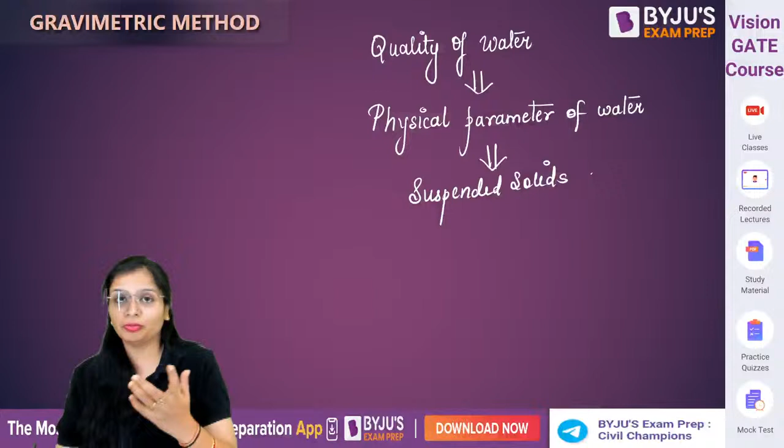But before talking about suspended solids, we have to discuss a few related things: from where do suspended solids come in water, what is the impact of it, how can you measure it, and if there is any limit, what is that limit? We will be discussing all these things about suspended solids.

Now, if you talk about the source of suspended solids, first of all the sources can be either organic in nature. As you can see, suspended solids basically means water with some sort of solids floating in it. Now, where do you get these suspended solids from?

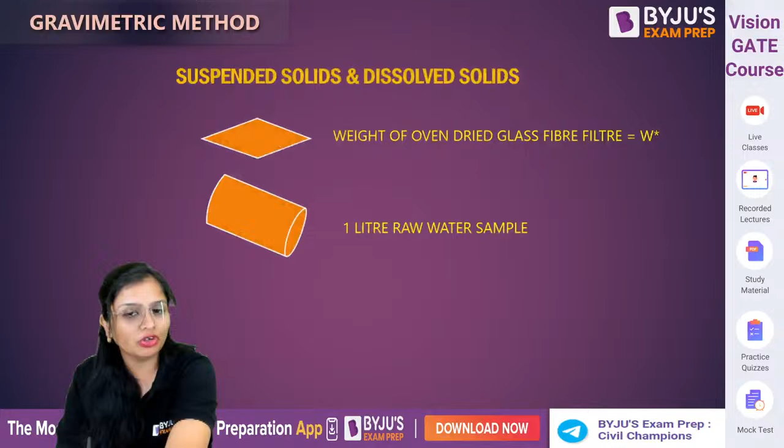If I talk about suspended solids, let me first show you the type of solids. So the suspended solids can be organic or inorganic. The sources can be organic as well as inorganic.

Now you will ask, how can we distinguish between organic and inorganic compounds? Let me tell you: organic compounds are generally those which predominantly have carbon in them. I'm not taking exceptions into account, since you might say 'this is organic but it doesn't have carbon.' So generally speaking, to distinguish organic or inorganic compounds: organic compounds are those with predominantly carbon, while inorganic compounds are those which basically don't consist of carbon.

Now comes the question of whether it be clay or silt particles, which are inorganic compounds, or whether it be organic compounds which have carbon—if either is present in water, its presence will impart solids.

Now if solids are present, what is the issue? Is it not good for us? Let me tell you. Suppose you come to my home and I give you water in which some sort of solids are floating. Will you drink that water? Of course not. Why? Because you have a psychological impact in your mind.

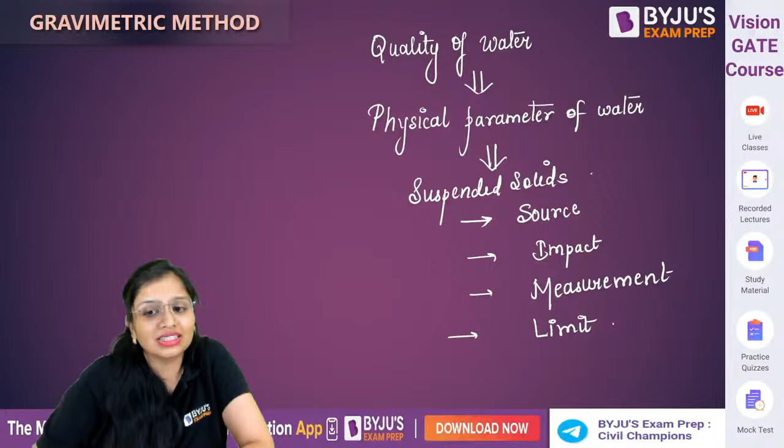If I'm giving you a glass of water which consists of suspended solids, you have it in your mind that it's not looking good, we won't drink that water. So because it is a psychological impact, this is the first impact: it is aesthetically displeasing.

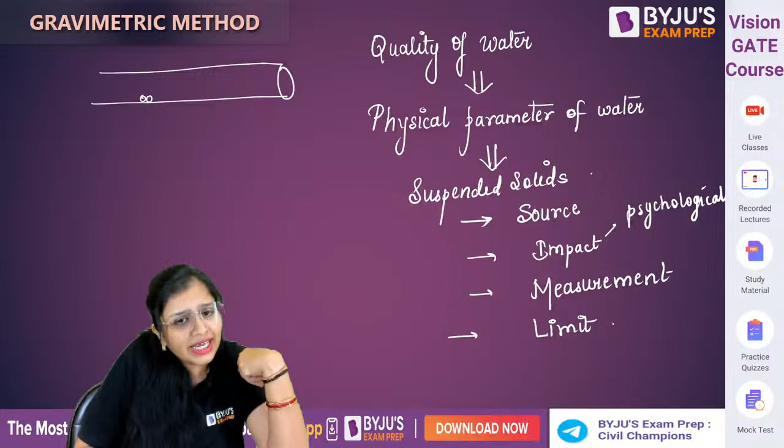Now talking about the next impact. Suspended solids are there. Water, how do you carry it? With the help of pipes. If in these pipes the suspended solids get deposited, initially this much area was available for water to flow. Now since suspended solids are getting deposited in the pipeline, you have less area to flow. You never say that discharge in the pipeline is reduced—this is also an interview question, so remember that.

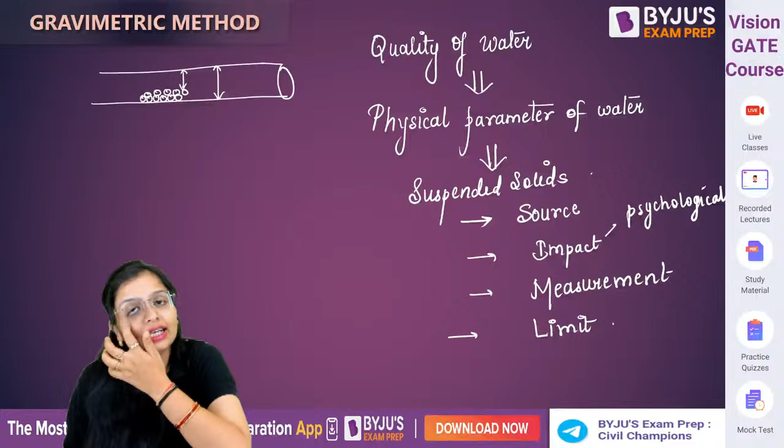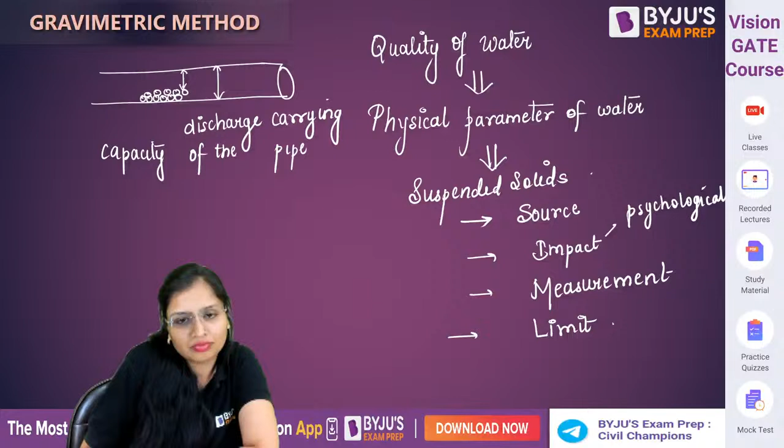You say that if deposition of solids takes place, the discharge carrying capacity of the pipeline will reduce. So it's the discharge carrying capacity of the pipe that will reduce. Why? Because eventually over time the suspended solids get deposited, and that is the reason the discharge carrying capacity of the pipe will reduce.

Now the next impact: generally in the Indian subcontinent we use chlorine for disinfection. You may ask, ma'am, why don't we use ozone and such? We'll deal with that when I teach you disinfection—it's costly, and there are more factors to consider while choosing a disinfectant. So when you add chlorine for disinfection, what happens if you haven't treated the suspended solids and they're present in water?

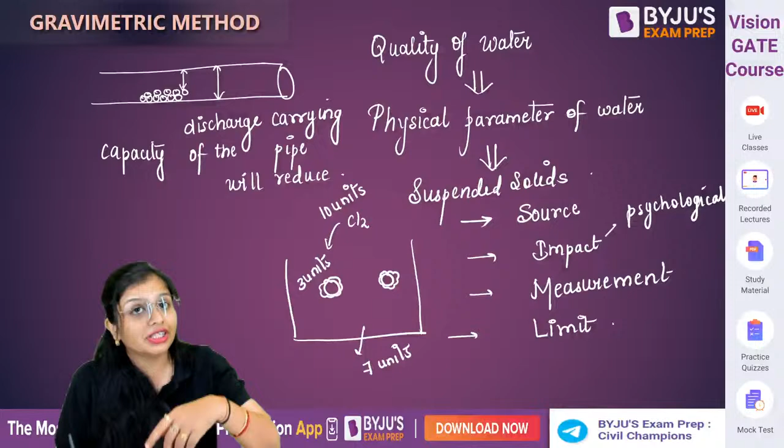See, these suspended solids are present, so what happens? The chlorine will be absorbed. Suppose you added 10 units of chlorine for disinfection, and 3 units got absorbed. So how much is available for disinfection? 7 units. That means your disinfection will not be completed, because you require 10 units of chlorine dosage, but 3 units got stuck with the suspended solids. So the available chlorine for disinfection is only 7 units.

That means disinfection is not completed, so you need to add more amount of chlorine. That is also one of the impacts you get if suspended solids are present in water.

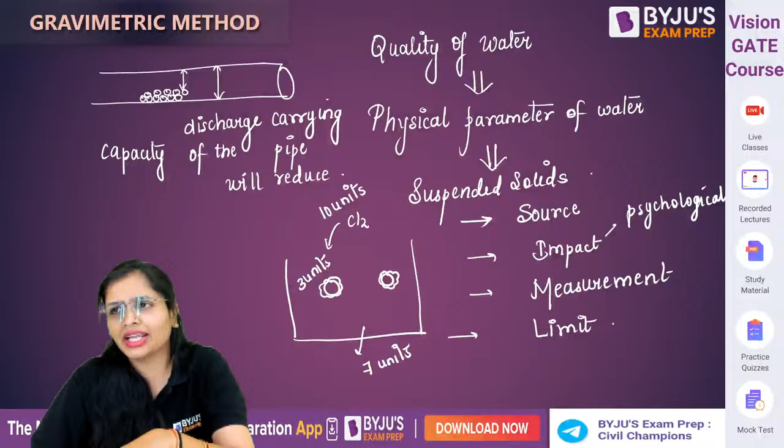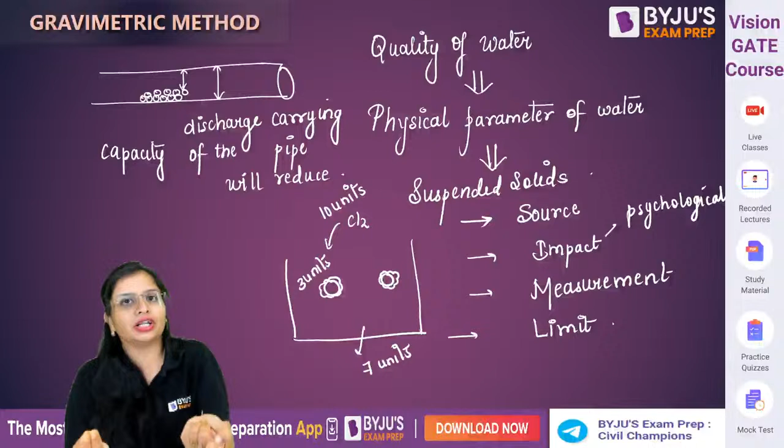So now you know the source can come from sand, silt, organic solids—it can come from anywhere. The impact we also know. But how do we know how much suspended solids are present in water? Can you say it in terms of teaspoon or tablespoon? No, you have to express it in terms of a particular unit and value. That's why we go for the measurement of suspended solids, and this is very important because questions from this topic have been asked.

For doing everything there is a technique. So measurement of suspended solids is done with the gravimetric technique. Gravimetric technique means we will measure its weight—we will report in terms of weight. That's why it is called the gravimetric method.

Now let's check what happens here. Technically, if you talk in a wider range, there are total solids. Let me tell you first in a wider range: you have total solids. Let me add a slide and I'll explain that.

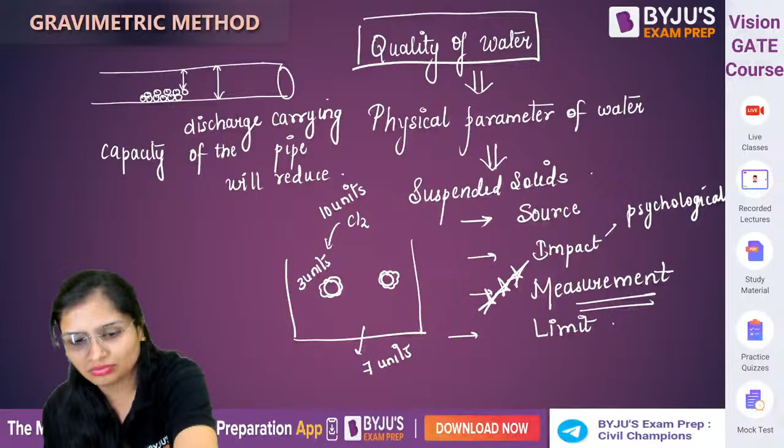Okay, now let me tell you. First we have total solids. This total solids consists of both suspended solids and dissolved solids. Suspended solids are those in suspension in water, while dissolved solids are soluble and have been dissolved in water. These are those solids, correct?

Now technically we have to talk about the measurement of total solids and suspended solids, but I'll also tell you about measurement of dissolved solids. Remember guys, the procedure I'm going to tell you, they will not tell you in the question that doing this procedure you will get suspended solids, or dissolved solids, or total solids. You will check out the procedure and you have to rectify and know whether it is total solids or suspended solids. They will write the procedure and whatever value you get, they'll tell you, but they will not tell you which type of solid it is.

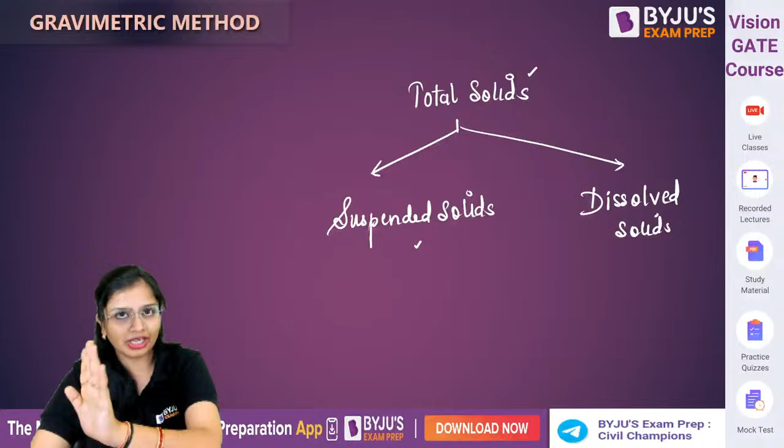So that is the reason the procedure to calculate the weight, to know the weight, is important. Otherwise you won't be able to solve it. That's why the whole method of gravimetric analysis is important, and only then will you understand when you are getting suspended solids, dissolved solids, or total solids. We will even go into a more detailed version, organic, inorganic. Just wait in this session, we'll solve questions also. It's not that I'll just teach you the theory and leave.

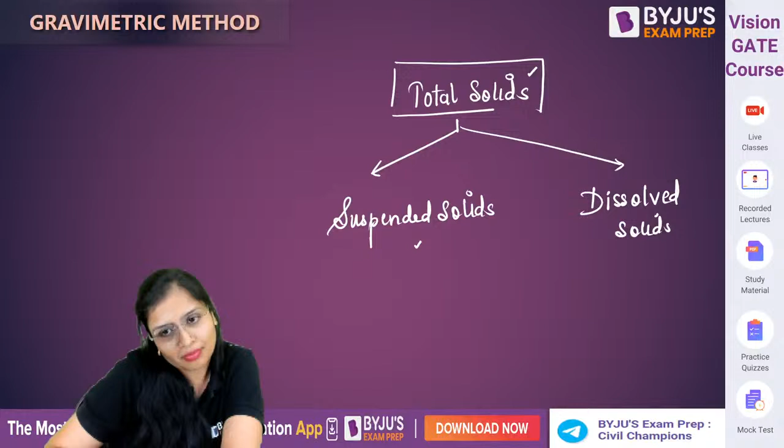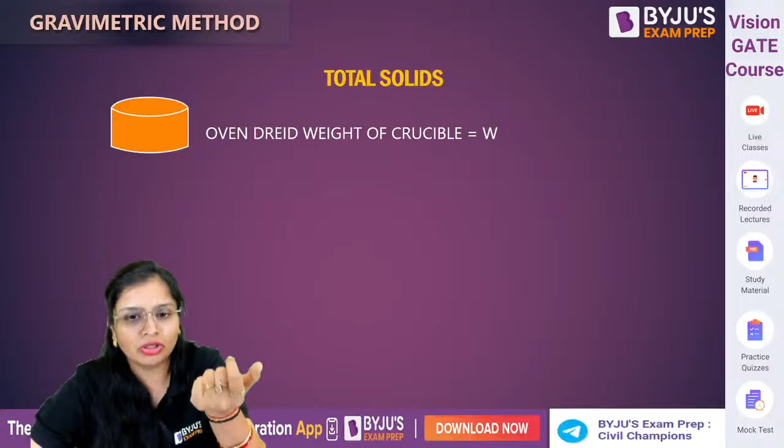Now first of all, let us target total solids. You have a beaker, you have a crucible also, you can say that is like a China dish. So generally sometimes moisture is there in it. So sometimes they'll give you, just to confuse you, the weight of the crucible with moisture and then the weight of the crucible separately. So you need to subtract the moisture content, because we don't want any water present inside that crucible. So we want it oven dried.

So we want the weight oven dried, let us suppose its weight is W. I am just telling you first the denotions which are there in the book, but practically I'll advise you, and I'll teach you in that manner too, that don't go through the denotions only. It is very confusing, you will just hate it if you go through the denotions. So it's better to go through the logic rather than the denotions. But some people are more fond of denotions also, so I'll tell you both ways. Whichever way you are comfortable, you can go through it.

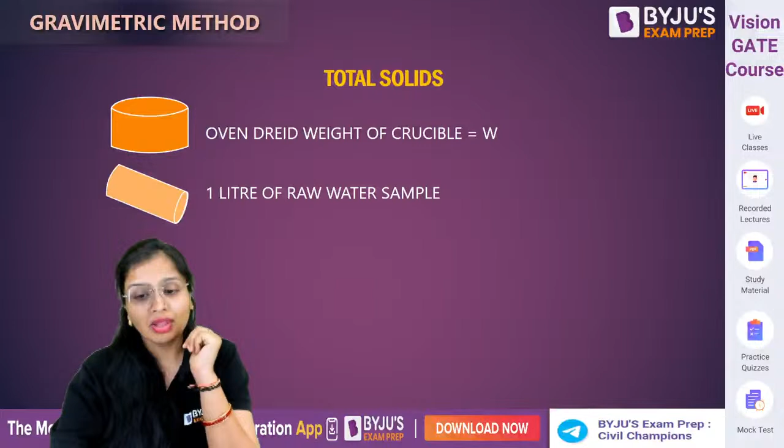Now let us suppose we have taken 1 liter of raw water sample. Raw water is that sample which is to be treated further, and right now we are going to measure how much suspended solids is there, how much dissolved solids is there. But before measuring individually, we will measure the total solids. So now in this crucible you will put the 1 liter of water. This raw water will have both suspended solids, in short SS, and dissolved solids. Now we'll put it in an oven at 104 degrees Celsius for approximately 24 hours.

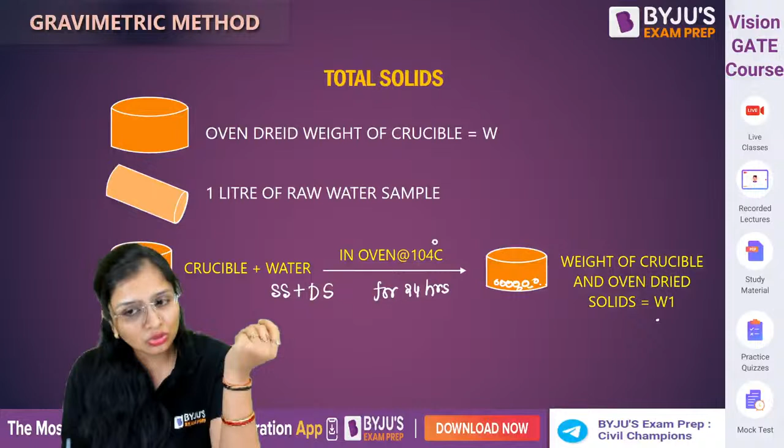Now what will happen? The water at this 104 degrees Celsius temperature will vaporize. The leftover particle will be total solids, and total solids will have both suspended and dissolved solids. So it is the crucible weight plus the solids weight. So from this crucible and dried solids weight, when you subtract the weight of the crucible, you will get the weight of the total solids. And I'm telling you again, total solids will include both suspended solids and dissolved solids.

And if you want the concentration, concentration is weight upon volume. Right now you are taking 1 liter of the sample, so divide by 1 liter. So this is the concentration of total solids. Now, total solids consists of both suspended solids and dissolved solids. Now if I want to measure individually how much suspended solids is there and how much dissolved solids is there, let's check that out too. First, the total solids which is there, you will pass it through a glass fiber filter.

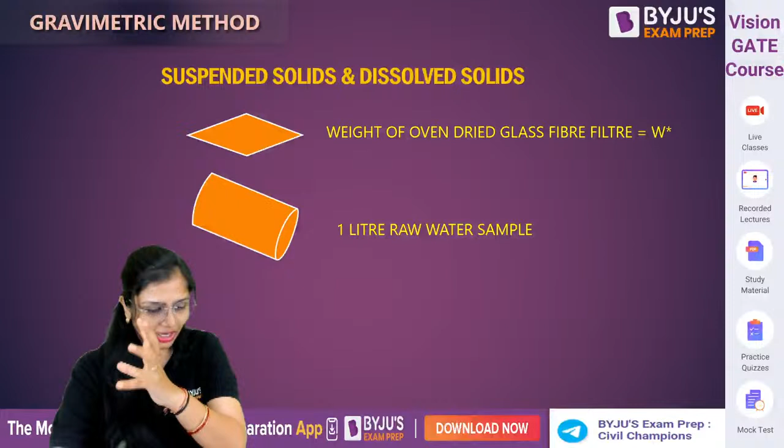Glass fiber filter, basically you call it filter paper, but if you go in detail you will call it glass fiber filter. Now in this filter, first you can take the weight of it. In some questions they will give you the weight of glass fiber filters, in some cases they don't.

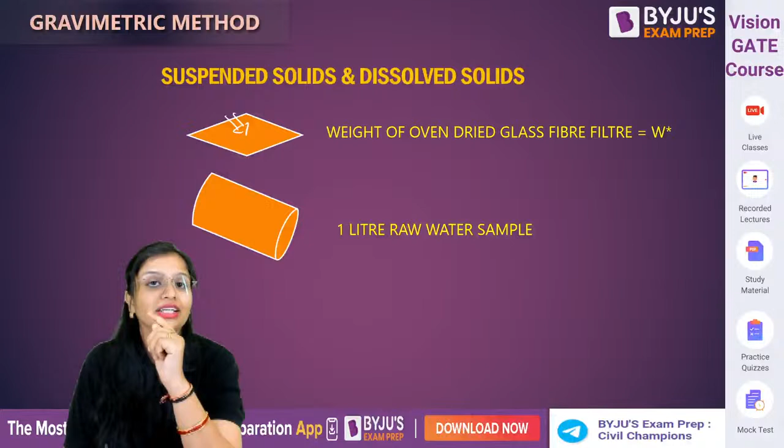Now what you will do is take this oven dried glass fiber filter and add water to it, the water in which you want to find the suspended solids. So when you add the water, what will happen is the suspended solids, however much are there, will be retained.

And the dissolved solids will pass through. So the filter paper along with the solids you will oven dry again at 104 degrees Celsius for 24 hours. So whatever vapor, whatever water was present - now you'll ask why water will be present, because it has passed through the glass fiber filter.

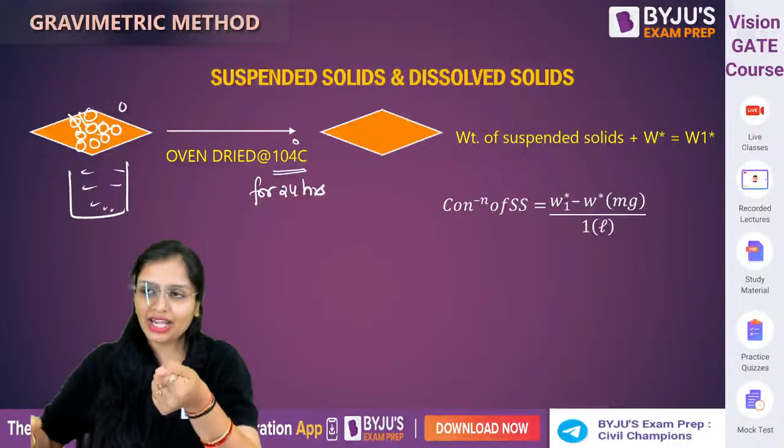Let me tell you one thing, everybody would have made tea, or if you haven't, you might have seen it. When you take the sieve and pour the tea, the leaves get accumulated in that sieve, right? Now that is suspended solids. Now when you press that sieve with the tea leaves using a spoon, you still see tea coming out. Exactly that is happening here with the glass fiber filter.

You have poured 1 liter of the sample, but still in the suspended solids, water is present, and you don't need to calculate the weight of that water. You only need the amount of suspended solids. That is why you oven dry it, so that if any moisture content is present, it vaporizes and you get only the weight of suspended solids.

So when you oven dry it, you will get the suspended solids plus the glass fiber filter weight combined. When you subtract the weight of the glass fiber filter, you will get only the suspended solids. It is not mandatory that in every question they will give you the glass fiber filter weight also.

It is in micrometers, beta. It is in micrometers - glass fiber filter fibers, you know, it is in microns. So here you will get the concentration of suspended solids.

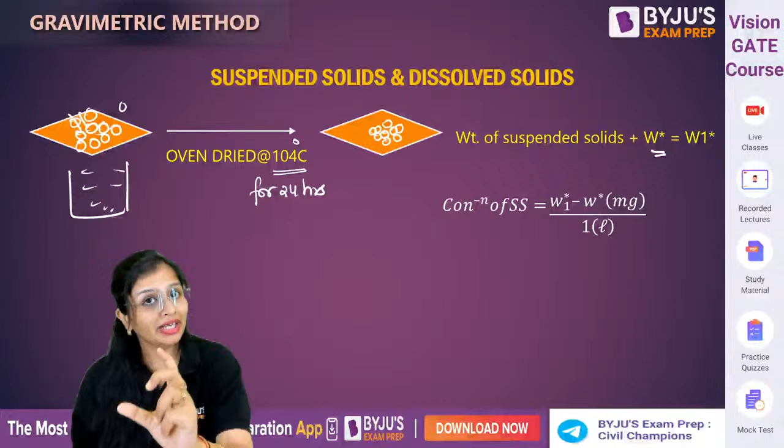And let me tell you, it is not mandatory that in every question they give you the weight of the glass fiber filter. Sometimes they neglect it, thinking it is very negligible. So don't panic that I taught it but it's not mentioned in the question - it may be they are not considering it as an impact.

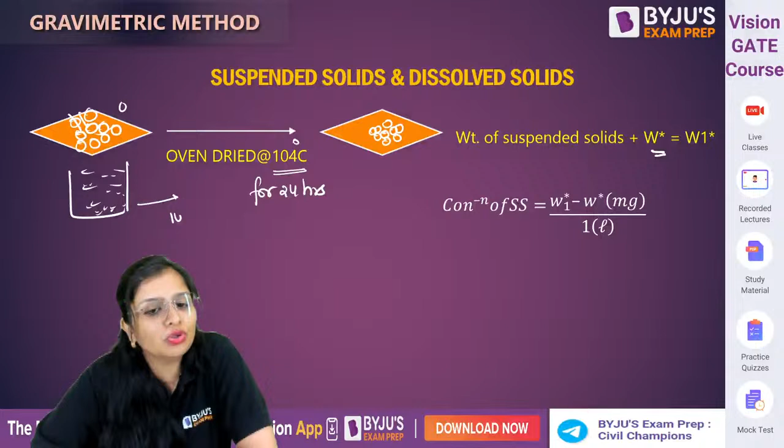Now, the amount of dissolved solids which have passed through the glass fiber filter, because they were dissolved solids, they haven't been retained on the filter paper. This, when you oven dry at 104 degrees Celsius for 24 hours, you will get dissolved solids.

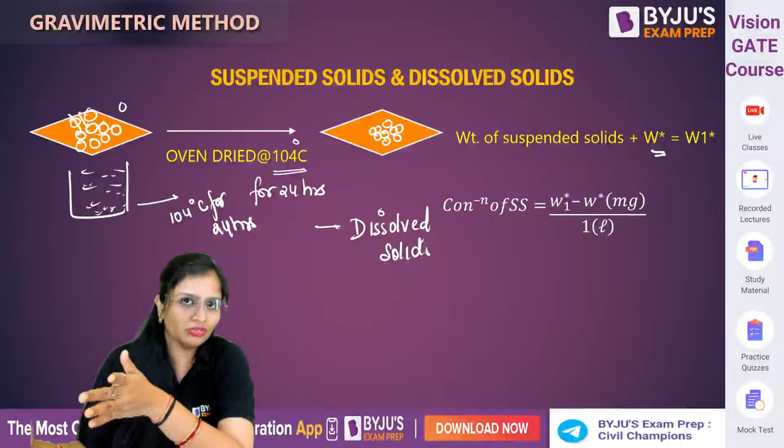So here you can also measure dissolved solids. When passing that 1 liter water sample through the glass fiber filter, you keep a crucible or beaker. Whatever suspended solids are there will retain on the filter, and whatever dissolved solids are there will pass through. The ones that passed along with water into that beaker or crucible, you heat for 104 degrees Celsius for 24 hours, and you get the weight of the dissolved solids.

So in this manner, you can get suspended solids, dissolved solids, and total solids. Now let me make it very clear - this procedure will be told to you, but they will not tell you exactly by doing what step you got suspended solids versus dissolved solids. You have to apply your brain to identify, oh this is suspended solids, oh this is dissolved solids. That is the reason I'm stressing more on the procedure, because you have to identify it.

Now, moving into more detail - basically you can classify them in different ways. Like the people who are in the class, I can classify you based on your gender, based on your age, based on the semester you are studying, based on your 12th percentage, based on your height, based on your weight.

There are so many ways by which I can classify you, but you people will remain the same. Only the means by which I'm classifying will change, but that doesn't mean the number of students in the class will change, correct? Similarly, right now I said total solids will be the summation of suspended solids and dissolved solids.

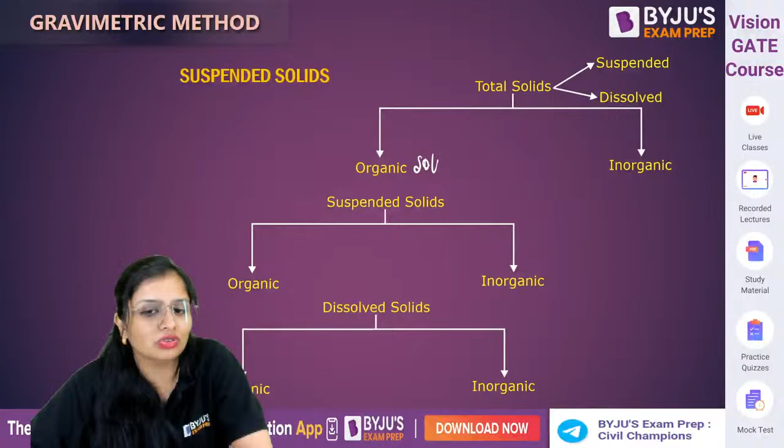Now there is another way of classifying, that is organic solids and inorganic solids. Already I told you organic solids are the one in which predominantly carbon is there. Inorganic solids generally don't have carbon in it. I'm not taking into account the exceptions.

Now you can ask me, ma'am, total solids can be organic solids, correct? True. Total solids can be inorganic solids, correct? Okay, now I want to measure, like I measured in total solids how much is suspended solids and how much is dissolved solids. Similarly, I want to measure in total solids how much is organic solids and how much is inorganic solids.

How can I measure? So let's talk about it. Now, just a minute.

Organic solid has the property that if you heat it at a very high temperature — now you will say, ma'am, high means how much? 600 to 650 degrees Celsius. So if you heat it at a very high temperature, it's like sublimation you might have studied in chemistry class 9, like camphor. It just directly converts from solid to vapor state.

Similarly, organic solids, if you provide a very high temperature, around 600 to 650 degrees Celsius, what will happen is it will vaporize directly without being converted to liquid state. So now what you will do?

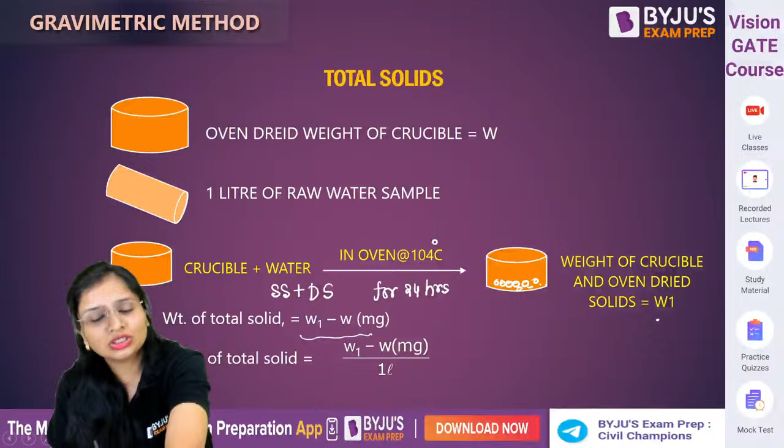Now listen to me. The total solids which you calculated, just check it out. This is the total solids you calculated, right? This total solids you will take it and you will put it in a special type of furnace.

Ma'am, for how many hours? At 600 to 650 degrees Celsius, you will take the total solids and put it in the muffle furnace for 1 to 3 hours. What will happen? Whatsoever organic solids is there, they will vaporize.

So what will be remaining? The inorganic solids. Inorganic solids will remain, so the one which remains, you can calculate the weight of it because it is remaining — you will measure the weight of it. Total solids you already calculated initially. Inorganic solids, you will measure the weight of it.

So organic solids will be how much? Total solids minus inorganic solids.

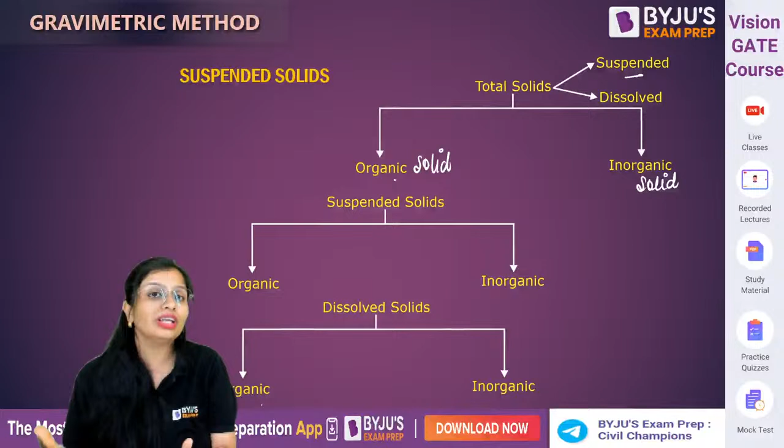Now, you can ask me, ma'am, even suspended solids can be organic and inorganic. Of course, even dissolved solids can also be inorganic and organic. Yes. So if next year GATE asks how much suspended organic is there, how much suspended inorganic is there, and so on, how to calculate that we will also see. But before that, based on what we've studied, let's solve a question related to it.

Okay, so right now generally we take 1 liter, but here they have taken the volume as 50 ml. Empty weight of the crucible is given to you as 54.352 grams. Now see, they are telling you the procedure.

Now you have to identify: the crucible with the sample, meaning water is also there, that crucible is dried in an oven at 104 degrees Celsius till the weight is attained to be 55.129 grams. That means crucible weight plus total solids. Moisture is gone, so crucible plus total solids weight they have given you as 55.129 grams.

Now, going further, thereafter the crucible with the dried sample is put at 600 degrees Celsius for 1 hour in a muffle furnace. You know then when total solids will go, volatile solids will vaporize and the remaining one which you will get will be inorganic solids. So 54.783 grams - this is crucible weight plus inorganic solids.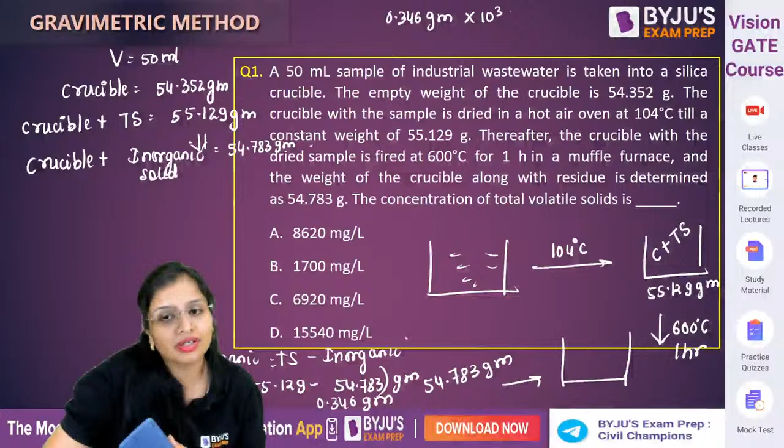But in the question, it is not asking me the weight, it is asking me the concentration. So 0.346 grams converted into milligrams is 10 raised to power 3. And this is present in how much volume? 50 ml, convert ml into liters, divide by 1000, you will get the answer. How much it will come? 6920 mg.

Clear? Now coming up further to the next question. Let's look at this carefully.

A 100 ml water sample was filtered through an oven dry filter paper. Now here weight of the filter paper is also given to you, that is 2.4 grams. Good question. And the filtrate collected in a crucible, the remaining water collected, is 23.50 grams.

Now some things are given for confusing, not every data is to be used. After oven drying at 104 degrees Celsius for 24 hours, resulting weight of the filter paper - initially the filter paper weight was 2.4 grams. Now in that filter paper suspended solids was also there. So after you oven dried it, the weight of the filter paper came out to be 2.465 grams.

In this, filter paper is also there and suspended solids is also there - filter paper plus suspended solids. Now see, this I am telling you based on the procedure. Nowhere in the question has it mentioned that it is suspended solids. Now you're getting what I'm saying? That's why I'm emphasizing on the procedure, because they are not going to tell you.

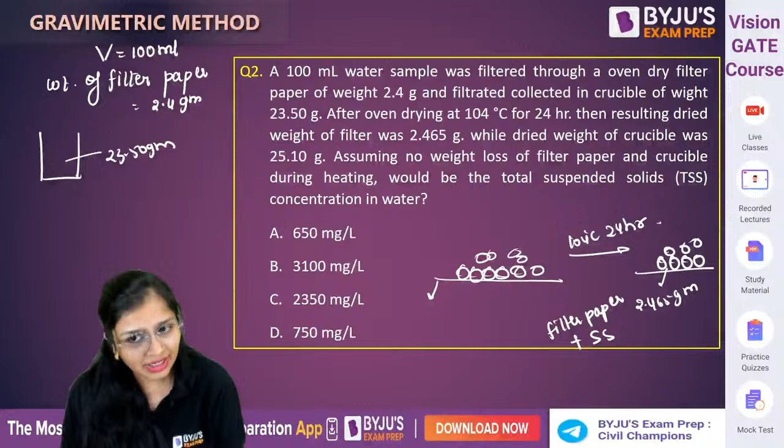So initially only the weight of the filter paper is given, and after that when you oven dry it, the filter paper and suspended solids weight is given to you. Now they're asking, no weight loss is taking place of filter paper, so what will be the total solids? Now see, this data you don't require, this is given to you just for confusing, because we don't need the weight of the crucible in the case of suspended solids. That is given just for confusing you.

You need only total suspended solids. So 2.465 grams was the weight of filter paper plus suspended solids. So you will subtract the weight of filter paper, that is minus 2.4 grams. And when you convert grams into milligrams, 10 raised to power 3. And this is present in how much sample? 100 ml, so convert ml into liters. You'll get the answer - you will get it as 650 mg per liter.

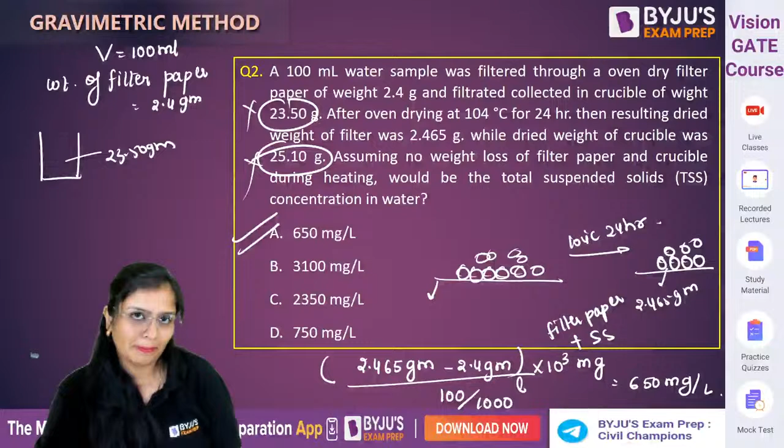So this will be the concentration. So see, they haven't asked related to filter paper, but definitely they can ask you. So some questions this data has no use - no use of crucible, because right now we are measuring suspended solids, and when you're measuring suspended solids, you're only bothered about the filter paper. Clear? Now coming to the next question.

Fine, take it out. A crucible was dried to a constant mass of 65 grams. 150 ml of sample - so volume of the sample is 150 ml. Okay, now initially the weight of the crucible they have given to you as 65 grams.

Now, this crucible has 150 ml of water placed in it, and then it has been dried. That means crucible with water, at 104 degrees Celsius for 24 hours. So what happens is the water will vaporize, and you will get only crucible and the solids. That is total solids. How can you know it's total solids? Because nowhere in the question is it mentioned that it passed through filter paper or that water is being retained. That means, obviously, this is total solids.

So crucible plus total solids is 67 grams. Now this residue was placed in a muffle furnace till you get 65.5 grams. So what do you get? You will be getting crucible, plus what remains, which is always the inorganic solids or non-volatile solids. How much is it coming to? 65.5 grams. Now the question asks for concentration of total solids and volatile solids.

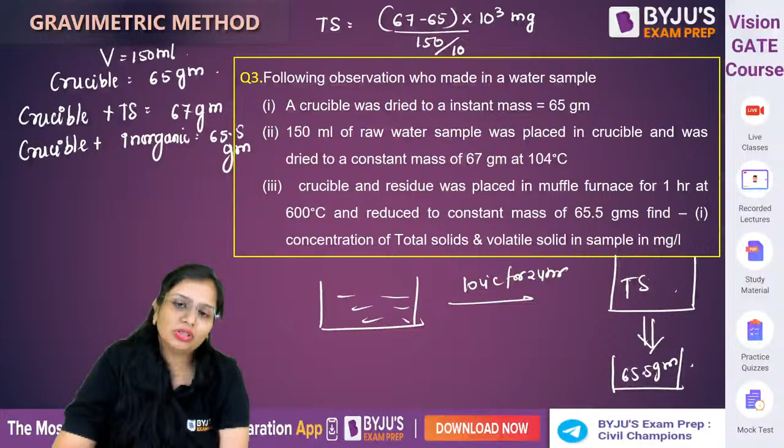So first let us calculate total solids. Total solids will be how much? Crucible plus total solids is 67. Only crucible is 65. So what you will do is 67 minus 65. Convert grams into milligrams, 10 raised to power 3 milligrams. And volume is 150 ml. Convert ml into liters. Clear? You will get it.

How much are you getting? 2000... you are getting 13333.33 mg. This is the total solids.

First answer. Now the next answer is to calculate volatile solids. I told you just now, we dealt with a question: organic solid or volatile solid, both mean the same thing. Either you say organic solids or volatile solids, both mean the same thing. So this will be total solids minus non-volatile solids, or say inorganic solids. How much will it come? 67 minus 65.5, this is in grams.

Convert grams into milligrams. And it is present in how much volume? 150 ml. Convert ml into liters. That's it, you will get the answer.

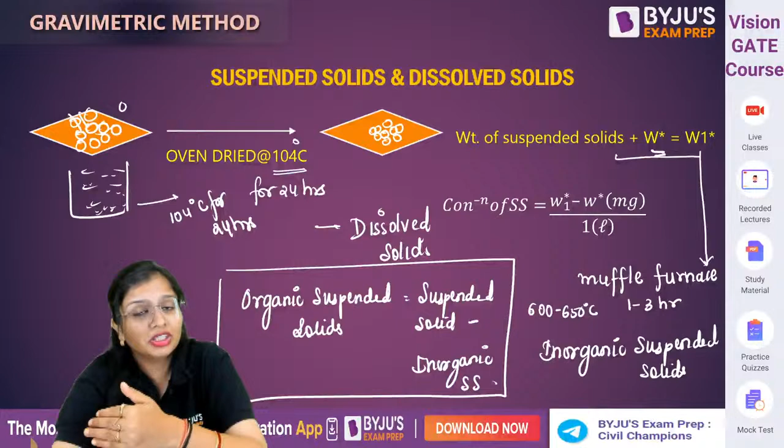Okay, now coming further, similarly if I want to measure organic dissolved solids and so on, how can I measure it? There are two ways. I'll just add one slide so that it will be better for you to understand. Okay.

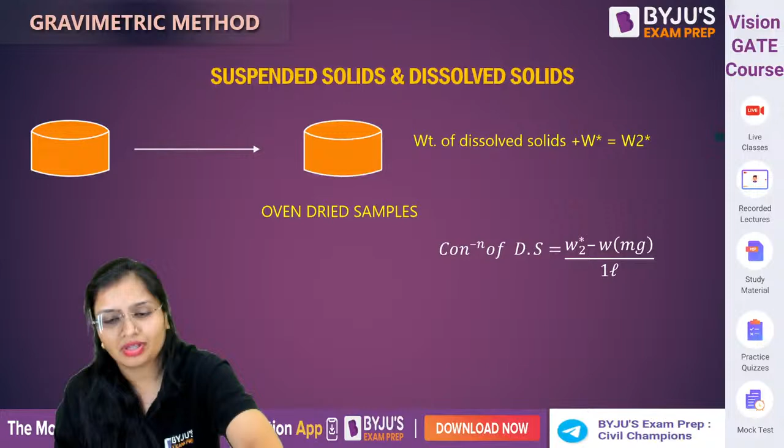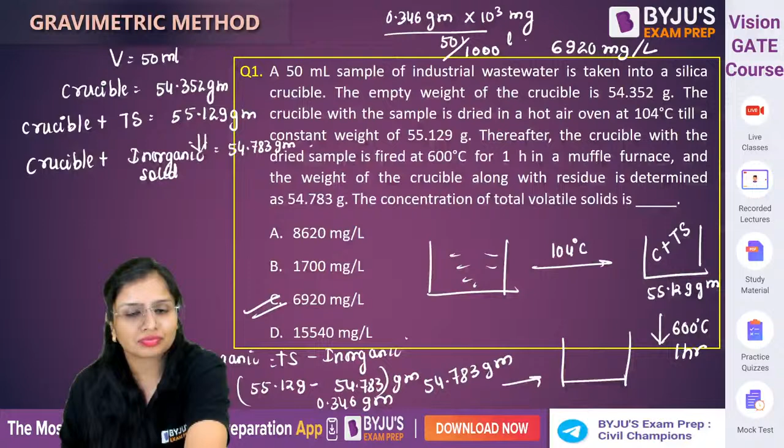Okay, fine. Now listen to me.

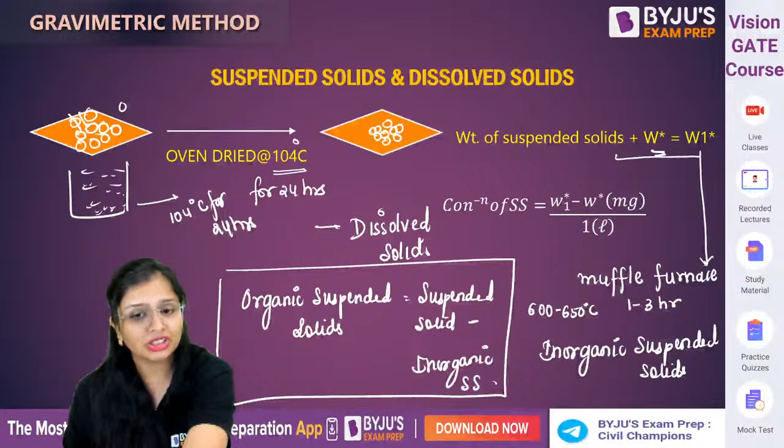See, have you already measured this? Already you have measured organic suspended solids, and you already know total solids. Total solids was what? Some organic, some inorganic. Right now I told you the procedure to calculate organic solids. Organic solids could be suspended, it can be dissolved also, it can be anything. So organic solids you have already calculated.

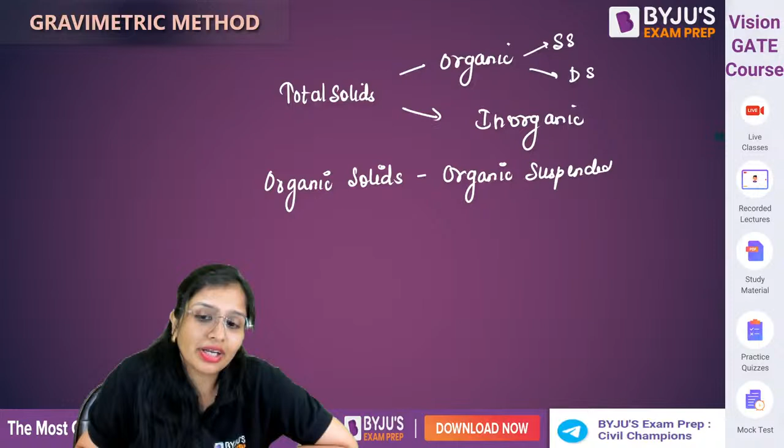Organic suspended solids right now I told you. So when you subtract organic solids minus organic suspended solids, you will get organic dissolved solids.

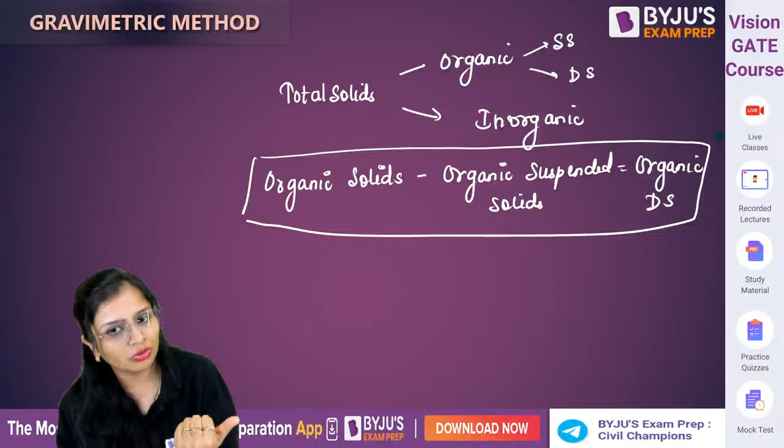Again, see, if this is the first time you are starting, it may become slightly confusing because you need to study it by yourself also. It's not that I'll just make you drink it and you'll remember it. So organic solids, right now I told you how to calculate it. Organic suspended solids we calculate, you subtract it, you will get organic dissolved solids.

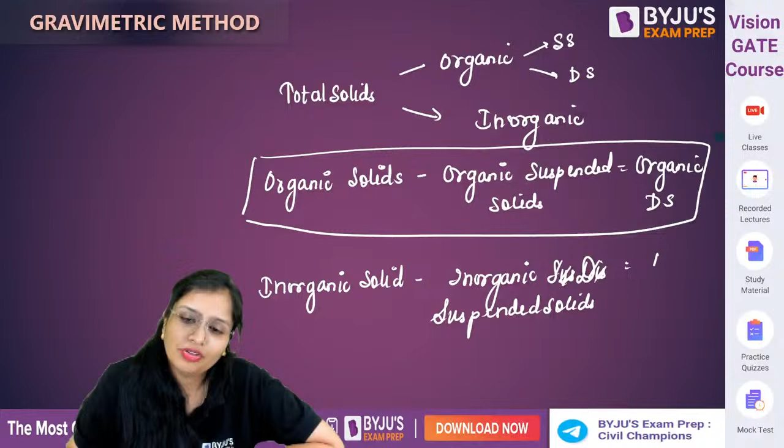Similarly, inorganic solids we have already measured by muffle furnace. Inorganic suspended solids also we measured the weight. Inorganic dissolved solids - first let's take suspended. So from here you will get inorganic dissolved solids.

This is also clear. So now in the question, if they ask you organic suspended solids, organic dissolved solids, inorganic suspended solids, inorganic dissolved solids, anything, you should be able to answer it.

Clear? Now you can ask me one thing - ma'am, is it possible that I will take only the dissolved solids? Whatever dissolved solids which you got, you take it in a muffle furnace. You will get volatile dissolved solids also, non-volatile solids also. You pass it through the muffle furnace.

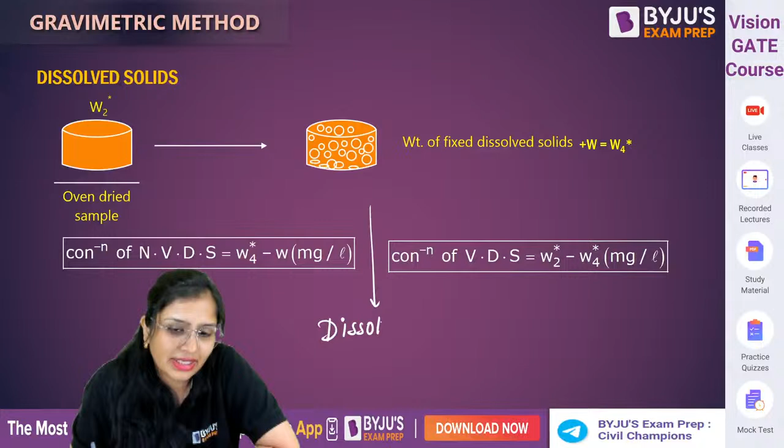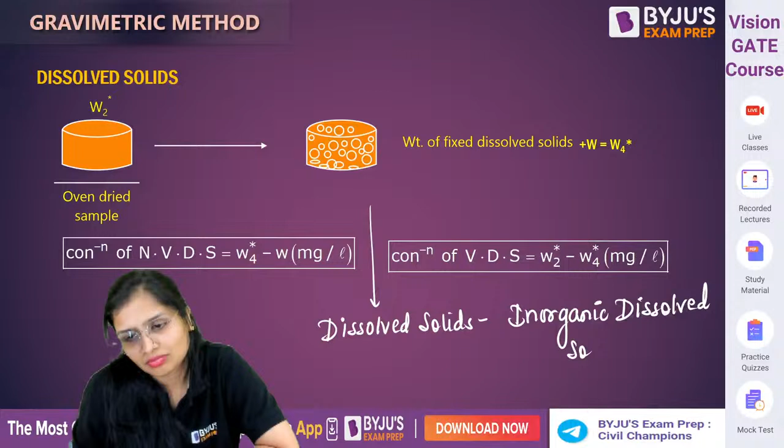So what will happen? Organic dissolved solids will vaporize. You will get only inorganic dissolved solids. So from dissolved solids, when you minus inorganic dissolved solids, you will get organic dissolved solids.

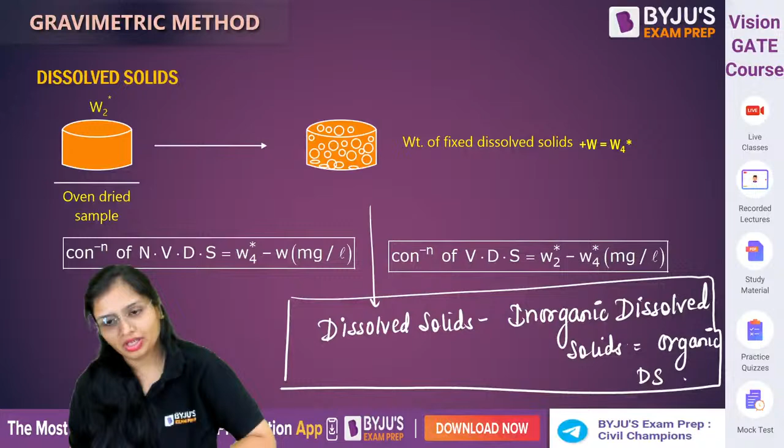So either you can go in this manner or you can go by this manner. Which manner you will be going depends upon the data which will be given. So you are not the one who will be deciding it, it will depend on the data given. Clear? So you can proceed in any manner which you want, you can calculate in any manner.

So generally till now in GATE, they haven't asked in detail how much organic suspended solids is present, how much organic dissolved solids is present, how much inorganic suspended solids or inorganic dissolved solids is present. Right now they have only asked total solids, total volatile solids, total non-volatile solids. But in future they can ask.

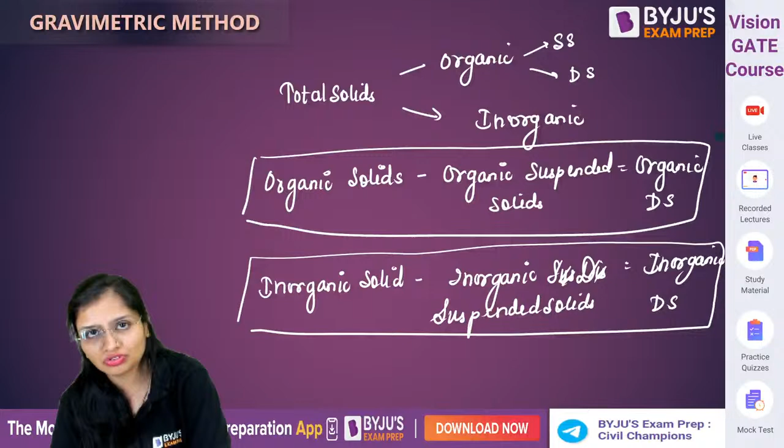So this was the gravimetric method, which was dealing with measurement of suspended solids, dissolved solids, total solids, as well as the measurement of organic solids and inorganic solids.